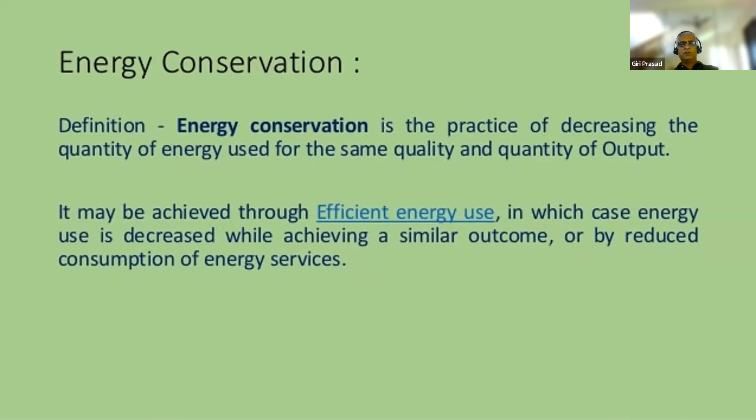So why do you require energy conservation? Energy conservation at a national level is required because when you save energy, you save some resources that went into manufacturing that energy. So you save financial capital, which increases for the nation. The environment is also safeguarded, because today most of the electrical energy produced in the country is mainly through coal based power plants, which generate a lot of greenhouse gases. So by conserving electrical energy, you decrease the production of electricity from these power plants, thereby saving the environment. Again, there is national security, because when you use lesser coal or lesser resources to produce energy, you have them in abundance, helping safeguard these natural resources.

Again, even for your personal security, when you have so many resources, you can feel you are saving money out of it. So that's again a personal security for yourself.

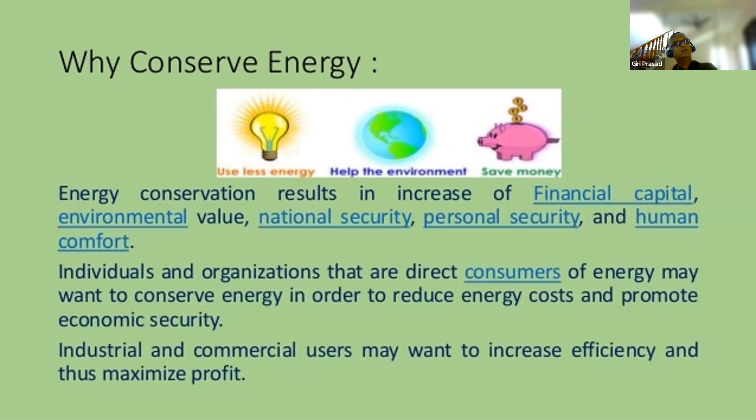What is energy management? Energy conservation is part of energy management. How do you manage your electricity consumption in an organization or industry is basically called energy management. Energy is managed by three ways: one is by energy conservation, one is by energy efficiency, and one is using other sources of energy, called renewable energy sources.

So what is energy conservation? Energy conservation is more of a behavior based practice where you don't need a light during daytime, you switch it off, or if the room is cooler, you may switch off your air conditioner, or when you step out of a room, you switch off your fans and lights. So these are all energy conservation measures, a behavior based method of energy management.

The other way of managing energy is through energy efficiency. So what is efficiency basically? Efficiency is output by input. For a given input, you produce an output. Efficiency is increased when for the same output, you use lesser input resources.

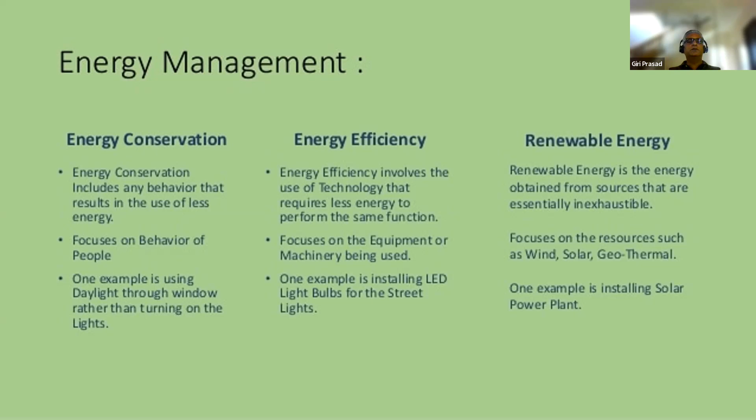While we speak about energy management, you have to know what is the objective of energy management in any industry. In any industry, basically three different costs get into production of a product: one is energy, one is labor, and one is material. Generally, labor and material usually either come at a fixed cost, or you cannot make much changes to the labor or materials.

However, you can make changes to the kind of machinery that you use or the amount of energy that you consume to manufacture the product. That's the reason energy is the only input in any industry that can be easily managed compared to labor and material. That's why there is a lot of importance towards energy management in any kind of industry.

By managing this, since it has a very high potential for cost reduction, what you can achieve is basically an optimum energy procurement and utilization, because energy is again scarce and it comes with a very high cost. If you are able to manage your energy efficiently, what you can achieve is an optimum energy procurement cost and a better utilization out of that energy.

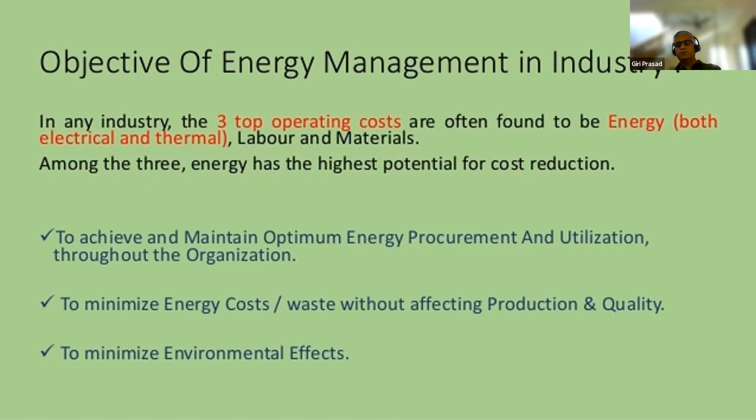So the saving potentials in any industry. Basically, what is industry? Any industry would have machineries, right? An industry is an addition of machineries, labor, and material, like I spoke. So many of the industries' machineries are either operated in a thermal format or an electrical format. So either the machinery is run by thermal energy or it is run by electrical energy.

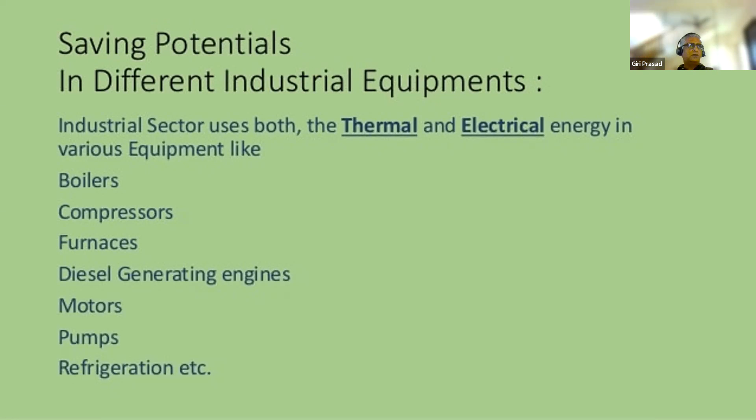Some of the thermal energy products are basically boilers, furnaces—these are some of the machineries that use thermal energy, while 80 to 90% of the industries only use electrical energy. Electrical energy is used to run compressors, motors, chillers, diesel generators, pumps, and refrigeration machineries, etc. So let us go through how you can save electrical energy.

I'll first touch upon a high level about how you can save electrical energy in an industry, but I'll go step by step into different kinds of machinery that we use in industries and how you can save energy there. In any industry, generally the kind of power that you get is high tension power. While the electricity that you use in your home is basically low tension power, industries are supplied with high tension power.

You can see this power factor basically in a three-phase power supply, a three-phase alternating current power supply. So if you try to improve or minimize the lag between the voltage and current, you can basically ensure that you prevent a lot of losses related to electricity.

So while you try to improve the power factor within the high tension distribution lines, what you can do is, first, you can save straight away on peak load charges, and it could also help you in avoiding losses.

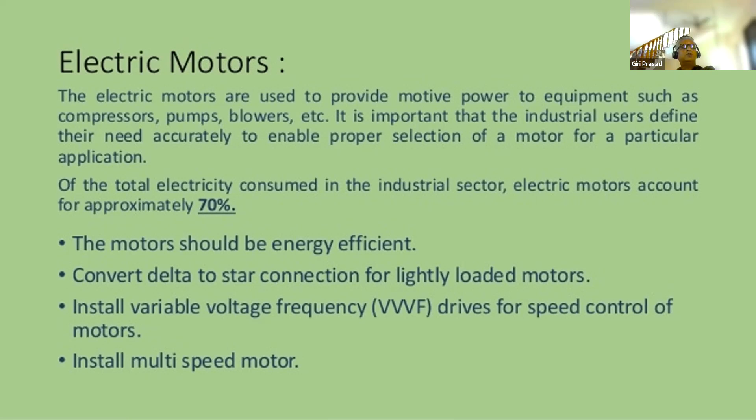Please use variable voltage frequency drives, or VVVF drives, for speed control of motors. Wherever you need different speeds for different functions, it's better to use a multi-speed motor, a single motor which can run at different speeds, rather than picking up a separate motor for each kind of speed.

Also, you can optimize the operating voltage level for lightly loaded motors. Motors run on electricity, and either the speed or the torque can come down if the voltage or current is not optimum for that motor. You would have seen even in our own house, a fan doesn't run at a good speed if it has low voltage, right?

So you'll have to ensure that for any electrical appliance to operate, it has to have the optimum voltage level. Similarly, wherever you have idle running in between operations, please ensure that you provide interlocks so that the motor is stopped there, and during idling you don't need to even operate such motors. Avoid frequent rewinding of motors, like I told you earlier.

And last but not the least, any machinery can be efficient only when there is regular preventive maintenance done on these machineries. Unless you monitor the condition of these machines or do regular maintenance, it will not operate efficiently. So it is very necessary that you have a regular plan of preventive maintenance for all these motors, and you monitor and ensure that these motors are being maintained on a regular basis.

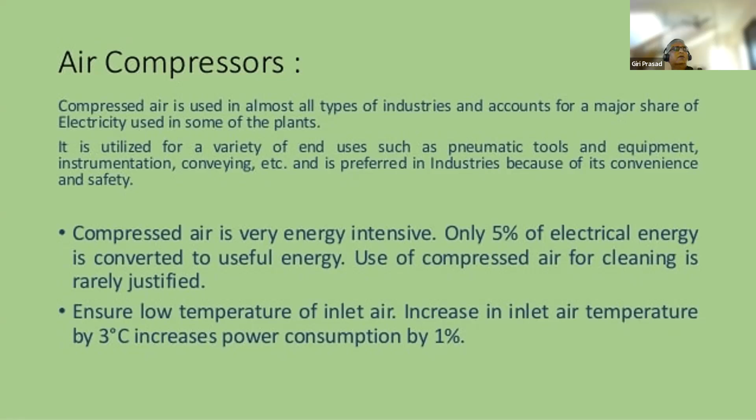So it is always good, while you look to place a compressor, to ensure that the inlet valve or inlet filter of the compressor is kept at a cooler place so that it absorbs cool air and the compression time is lesser. Thereby the motor running time is lesser, and the amount of energy used for compressing that air will be lesser.

Also, ensure that whether air at low pressure can be used for a process, because sometimes you might need only 10 pounds of air, or 10 kg per centimeter square of air, for a particular machinery. What you might do is end up switching on a 100 kg per centimeter square compressor. So you are not using the right compressor or the right amount of air for that purpose. You'll have to ensure that wherever you want low air pressure, you use those kind of compressors instead of taking a connection for air from a bigger compressor.

Again, leakage is another big thing that you can generally see in industries. If a compressor pipeline is leaking, it is a loss to the company. Ensure that none of your airlines or air supply lines have any leakage. There should be a regular inspection and maintenance mechanism for all these air supply pipes to see that none of them are leaking.

You also have to measure the average electricity consumption of these compressors, because over a period of time they become less efficient and thereby draw more current. So it's necessary that you keep monitoring the performance of these compressors in terms of electricity consumption. Wherever you see it consuming higher electricity, you might need to find out what the problem is with the compressor and correct it so that it consumes lesser current.

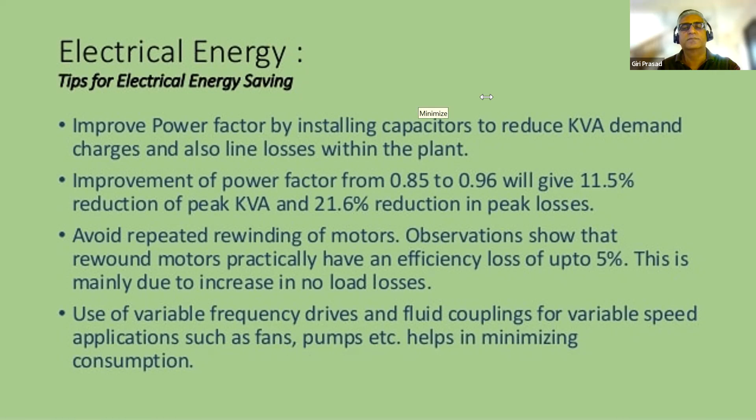Okay, so the other kind of machinery or equipment used in industries is a cooling tower. Cooling towers are basically machinery used to provide chill water for different applications in the industry. There are generally two kinds of cooling towers: an air cooled cooling tower and a water cooled cooling tower. Industries generally use a water cooled cooling tower because it is more energy efficient than an air cooled cooling tower. This cooling tower basically uses air and water.

Basically in a cooling tower, what happens is the tower gives, on one direction, a mist or rain kind of water spray, and there is a water line that flows in between, a medium where on top it gives a chill, a rainwater or mist kind of water spraying, and from below it pushes air. So this mixture basically cools the water pipeline that goes through it, and that carries the chill water to different applications in the industry.

Many industries use these coolings for either cooling some of the machinery, or for air conditioning purposes also, for centralized air conditioning. So this is again one of the major energy consumers in many industries. It is necessary that you have the machinery in such a way, because there is a constant exposure to water and moisture through the air.

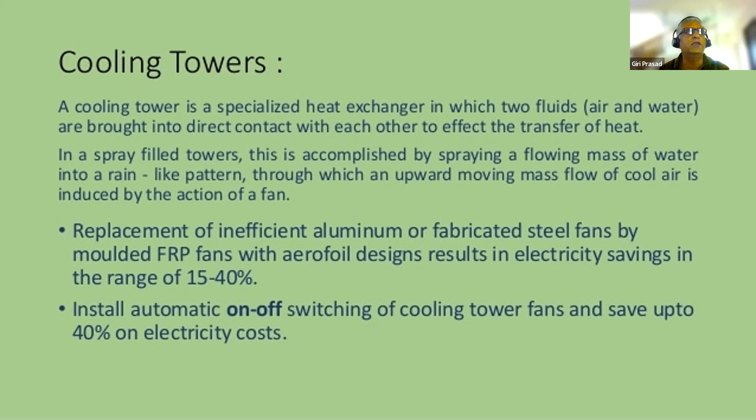Also, you'll have to see the kind of water that you use. You should not be using ionized water or hard water for cooling towers, because this will again cause rust, and it can affect the thermal carrying or cooling capacity of this water, which can lead to higher electricity consumption. Again, that is one thing that you'll have to look at in a cooling tower.

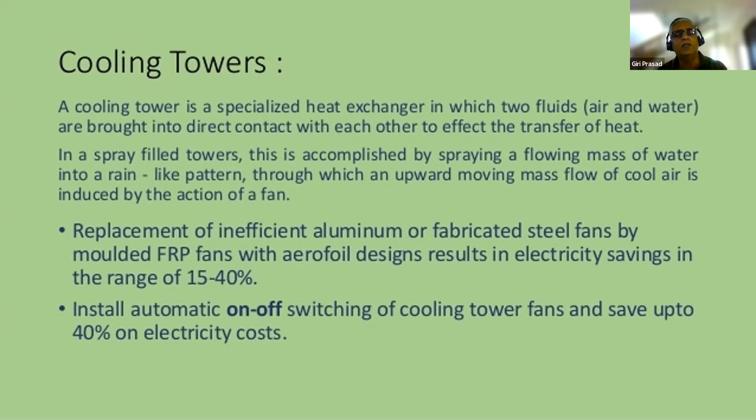Also, the chill water line after going out of the cooling tower should be properly insulated so that it doesn't lose the temperature while it flows through those pipes to that particular output mechanism. So ensure that those are being insulated properly.

The other kind of thing that you can see very often is pumps. Pumps are basically used to transport fluid, basically oil. Oil is the major item that gets transported through these pumps at a very high pressure. They are used either for hydraulic presses or for other purposes within the industry. And again, these are driven by motors.

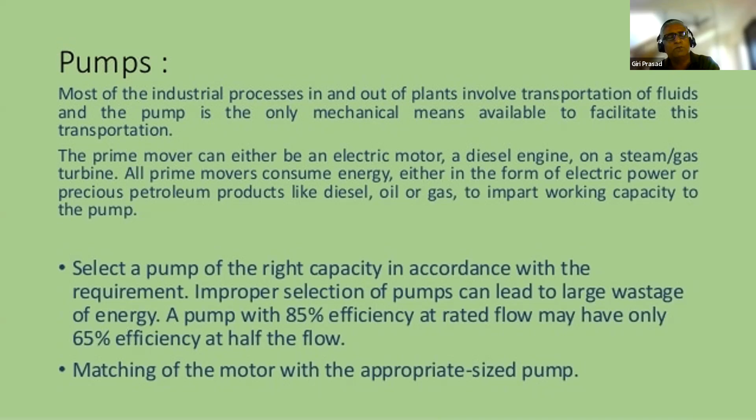So you'll have to ensure that these pumps are working fine and efficient enough, and you'll have to select the right pump capacity for a particular application. Because if you don't use the right pump, either you use an overrated pump, meaning you are consuming more energy for a lesser effort, or you might use a lesser capacity pump for an operation, which can fail the operation. So it is necessary that you select the proper pump and motor rating for the pump you are going to operate. Matching the motor is equally important.

Then again, the flow of the fluid is often maintained through a throttle valve. You can see a circular valve that basically controls the flow of this kind of fluid. What you can do instead is use a variable speed drive. Why you should not use a throttle valve is because the motor will run at 100% capacity, while the application might require only 50% of the capacity of the pump. So while you use a throttle valve to regulate the flow of the fluid, you are not regulating the power consumption at the motor level or at the pump level.

So if you use a variable speed drive, that will basically control the flow of the fluid, and thereby you can conserve electricity from these kind of motors. Again, equally important are shaft alignments, pipe leakages, and drive transmissions. All these are very necessary for ensuring that you don't lose any of the energy spent in transporting those fluids through this medium called a pump.

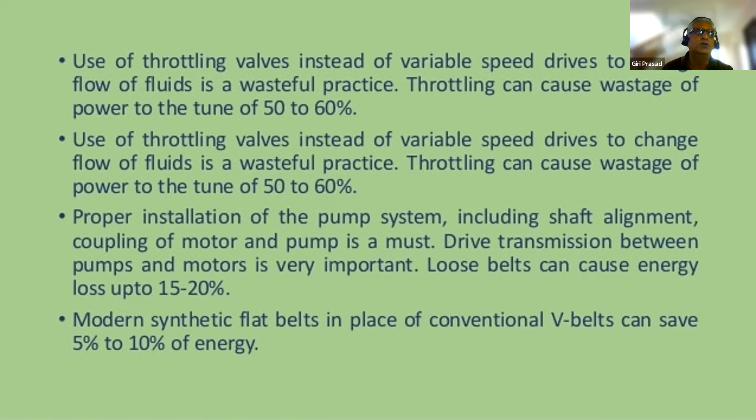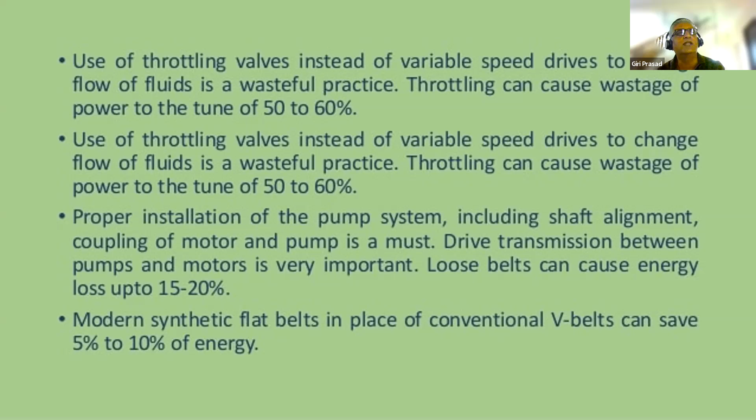Similarly, the belt that connects the motor to the pump should not be a V belt. It should be more a flat synthetic belt, so that there is lesser friction and the power of the motor is directly transmitted to the pump.

Another thing you can very often see in a few industries is refrigeration and air conditioning. These are generally used in food processing industries. What is basically refrigeration? Refrigeration is either removing heat from a low temperature level and rejecting heat at a high temperature level. Removing heat is like, the place is already cool, and you want to make it cooler. What you do is inject more coolness into that place, thereby it will absorb all the heat around that place, because there's heat energy.

Basically, heat passes from a higher energy medium to a lower energy medium, and it continues until it reaches equilibrium. Between a hot and a cold substance, the hot substance is a higher energy medium and the cold substance is a lower energy medium. So the heat passes from the hot substance to the cold substance. That is the same principle in refrigeration. It will remove heat at a lower temperature, and similarly reject heat at a relatively higher temperature.

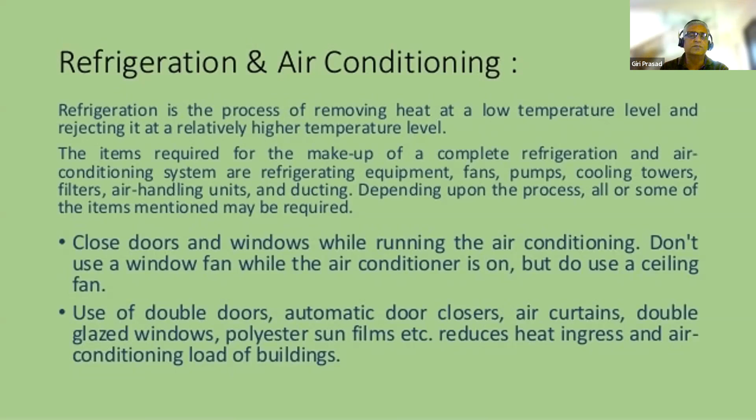Also ensure that the condenser coils are properly maintained without any rust or algae, because you need to have a proper heat exchange. Similarly, the compressors of these air conditioners should be maintained properly, should be located in a place where there is not much direct sunlight or any heated surface, because these compressors basically compress air and the input to them should be cooler air.

So if you try to keep it in an open, hot air place, it will take a longer time to compress the air. Similarly, power consumption should also be measured regularly with compressors to ensure that they are working efficiently. Similarly, the duct systems used for the transmission of cool air should be completely sealed and insulated so that it doesn't lose its coolness during transportation.

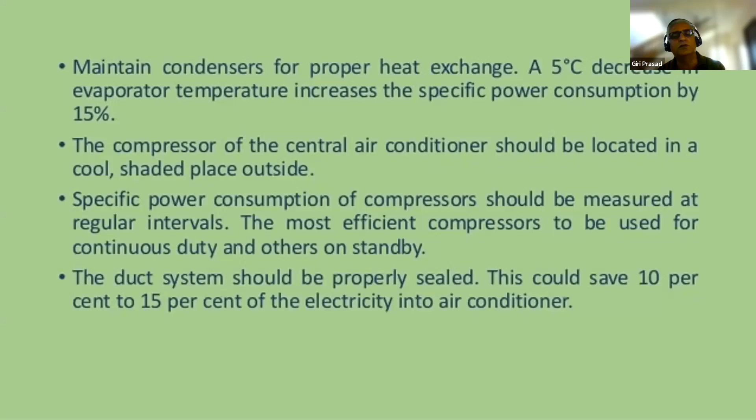Next is lighting. Lighting is measured by a unit called lumen. And another term in lighting is efficacy. Efficacy is nothing but the amount of lumen produced per watt of electrical power.

Wherever in lighting, ensure that you replace all your conventional ballast with electronic ballast, because conventional ballast, or the choke, will have hard capacitors and coils which have a higher source of energy loss. If you use an electronic ballast, it's a semiconductor product, so there won't be any heat loss.

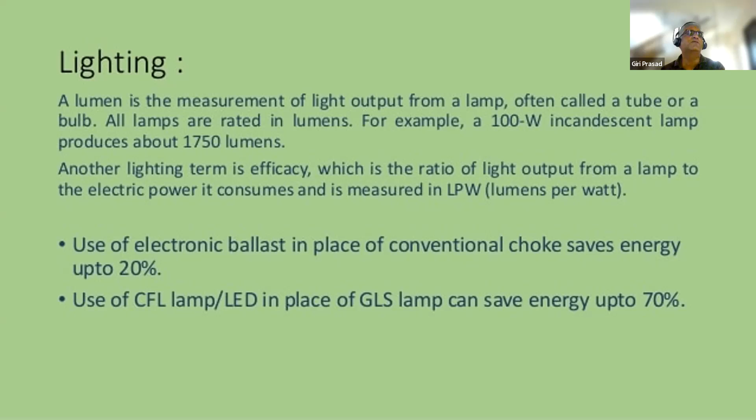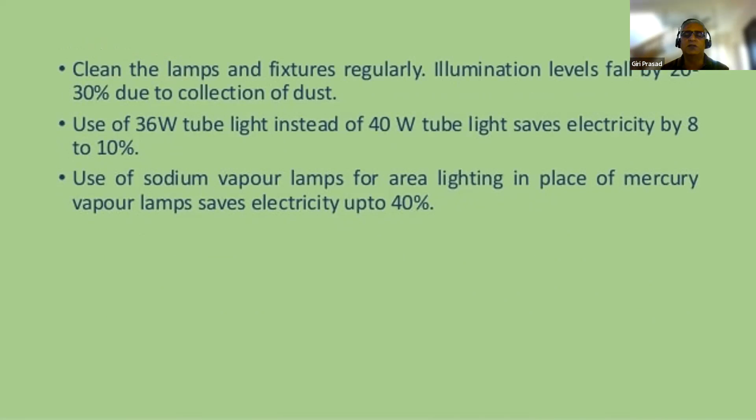Similarly, you'll have to use CFL or LED lights wherever possible and replace conventional incandescent lights with these kinds of CFL and LED lights, and also ensure that the fittings are cleaned properly. Also, wherever the lumen required is lesser, use a lesser rating of light fixtures. Similarly, sodium vapor lights can be used to replace mercury lights, because it also gives very good savings of electricity.

Again, I told you about thermal energy. Now we spoke about electrical energy. There is something called thermal energy. Thermal energy is basically produced by those boilers and all.

So what you need to do for thermal energy saving is have a regular audit to ensure that there is no oil leakage, no heat leakage, and that the oils being used are filtered properly at different stages so that you are able to combust that oil fully.

If there is no proper combustion, again there is either a heat loss, meaning the thermal energy that needs to be produced is lost, or you end up consuming higher fuel for producing the same amount of thermal energy. Similarly, you should have maintenance which very clearly indicates a culture of zero leak philosophy.

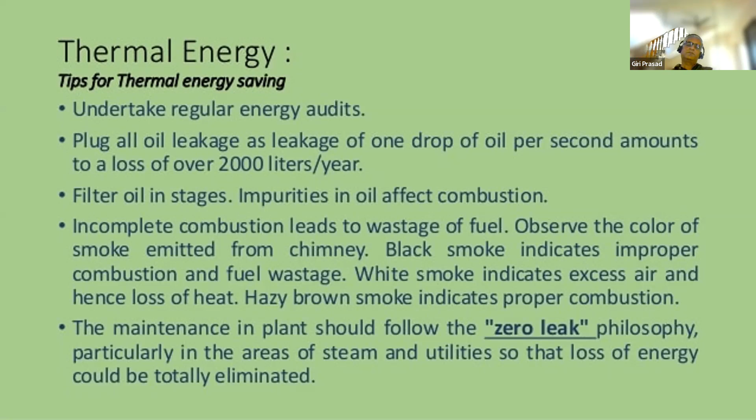Similarly, boilers are used for converting or conveying heat in different formats. Basically, one form - while I spoke about cooling towers and refrigeration, they use water to transport the coolness to an application. Here, boilers basically use steam as a medium to take heat to another application. And the kinds of fuels used for boilers are basically coal, oil, or gas.

Again, all these - coal, oil, or gas - are basically fossil fuels. So it is necessary that these kinds of sources of energy should be managed better. Otherwise, you would one day lose it for our other generations.

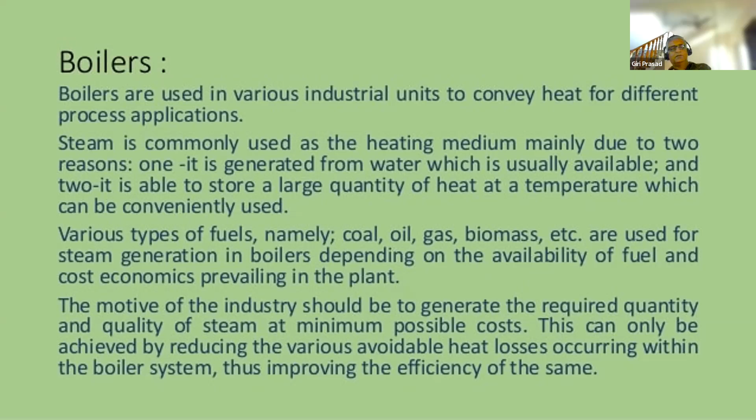Again, while you use water to produce steam, ensure that waters are treated properly, because they can form scaling in the pipelines and it can disrupt the flow of steam or the effective passage of heat from one place to another. Again, steam leakage should be stopped, I told you, right? And also the insulation should be done properly to disallow any loss of heat energy while transporting the heat through the steam.

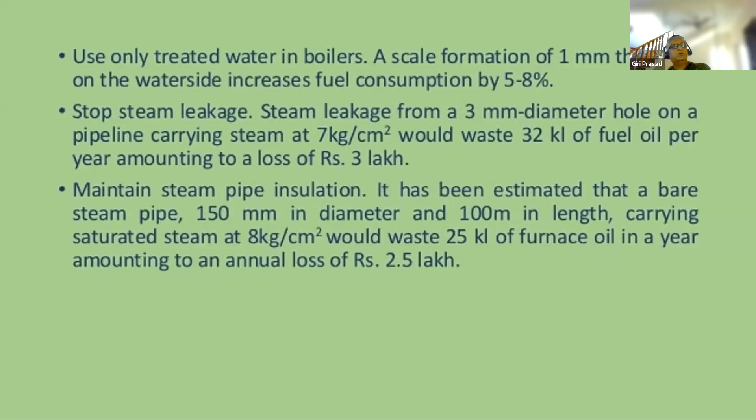Another energy source is diesel generators. Diesel generators are used in different formats. One, either it would be used as a main source of energy for producing electricity. Few industries use them as standby. Whenever the power supply from the grid fails, they use the diesel generators for producing electricity.

And few also use it during the peak load hours, while they don't get enough electricity from the grid. They use diesel generators as a complement energy source to run the operations. So diesel generators are equally and very important plant machinery in any industry.

So ensure that you maintain them properly, and see that injection pumps or filters are being maintained, repaired, or replaced regularly. Ensure that you measure the fuel consumption for every kilowatt produced by the diesel generators. Wherever you see the diesel consumed is more and the power generated is lesser, immediately look out for the snags or root cause for such problems and correct it immediately.

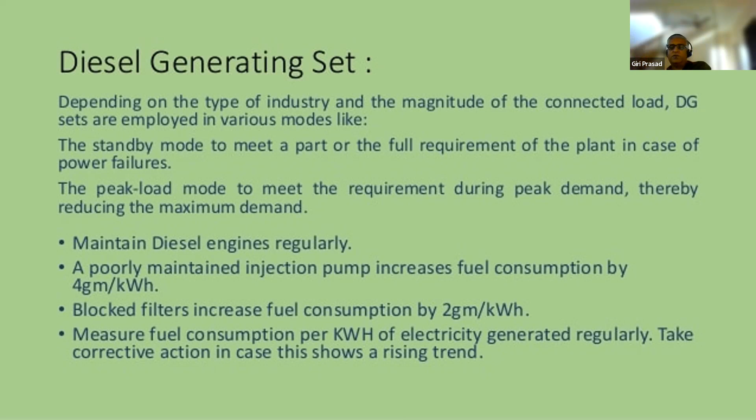Another form of energy management is energy audit. An audit basically sees what the situation is as-is and compares it against a standard or design, and by monitoring and analysis gives a report, a technical report which says what is running correctly, what is not running correctly, and what you can do to run it correctly so that you reduce energy consumption. This is the basic objective of any energy audit.

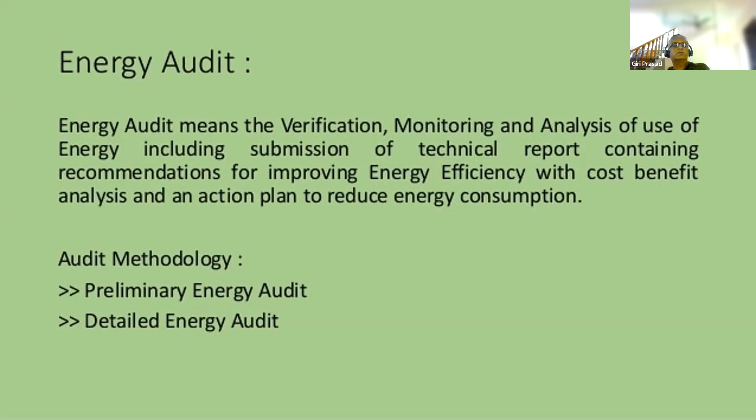You can do an energy audit in two formats: a preliminary energy audit and a detailed energy audit. The preliminary audit looks at what energy consumption is happening in a plant, gathers all that data, and identifies the most easy and likely areas of attention you need to look at to conserve energy. It does nothing but compare against the standard and give recommendations. A detailed energy audit looks into more detail of all these items.

An energy audit team first gathers data, then does sampling checks or measurements on their own to see the actual consumption of each piece of equipment. Then they do an energy loss or waste analysis: where is energy being lost, where are we wasting energy? After that, they identify and develop energy conservation opportunities and propose them to the organization.

Along with the opportunities, they state what cost would be involved in making those changes and what you will save, converting that into a money value like dollars or rupees. They say you can recover this money spent in so many years, which is called the payback period. So they do a cost-benefit analysis along with the payback period, report this to top management, and ensure the recommendations are tracked and implemented by the company.

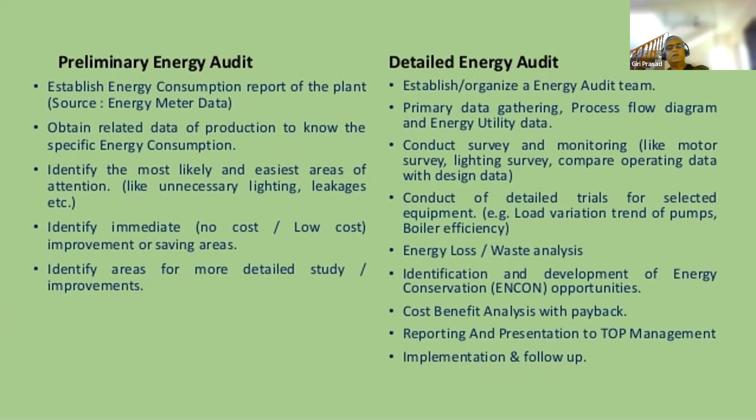This comes to the end of my session. Any questions till now?

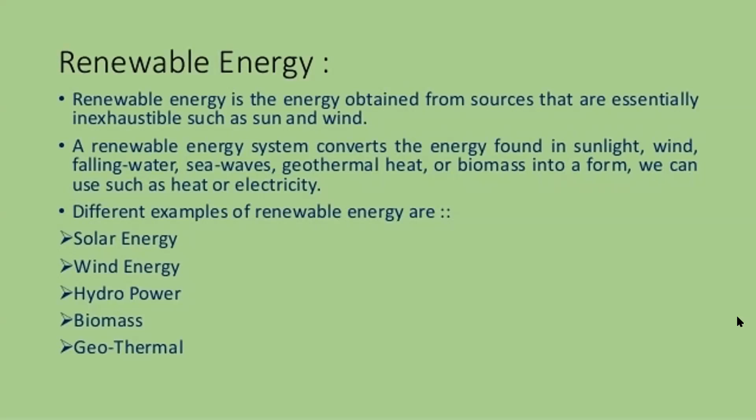Hello, sir. No questions? Participants, any queries, please type in the chat or raise your voice. I don't know why I'm not able to hear any of you. One minute, let me see. I'm sorry, I think I have kept my speakers muted. Can somebody talk? Let me try to hear. Hello, sir, audible? Yeah, audible. Sorry, actually it is a mistake from my end, I have muted my speakers. Okay sir, extremely sorry sir. Any questions? No questions from students, I'm very surprised.